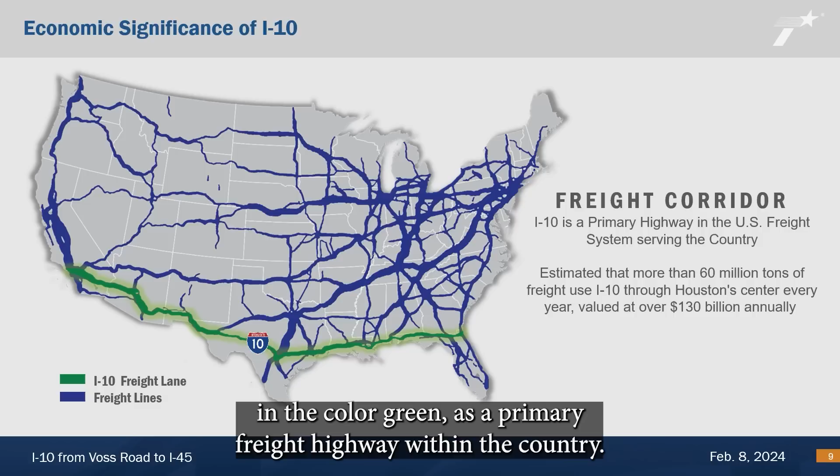The U.S. Department of Transportation has identified I-10, shown in the color green, as a primary freight highway within the country. Primary freight highways are those that are the most critical for freight transportation across the country. It is important to the movement of goods across the nation, Texas, and Houston itself.

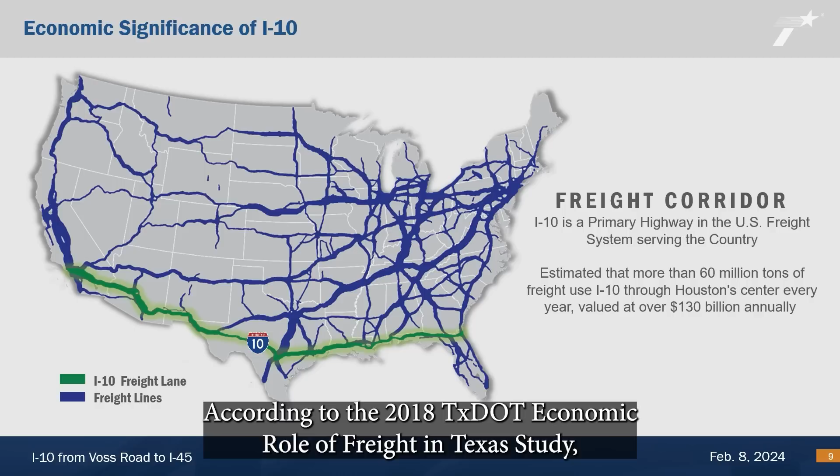Congestion increases the cost and delivery time of commodities such as Amazon deliveries, groceries, and commercial goods. The Port of Houston is the nation's largest port for waterborne tonnage and an essential economic engine for the Houston region. According to the 2018 TxDOT Economic Role of Freight in Texas study, it is estimated that more than 60 million tons of freight use I-10 through Houston Center every year, valued at over $130 billion annually.

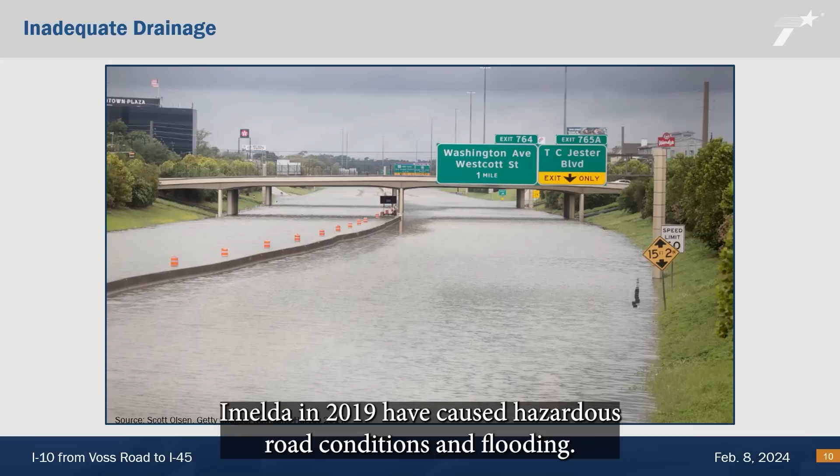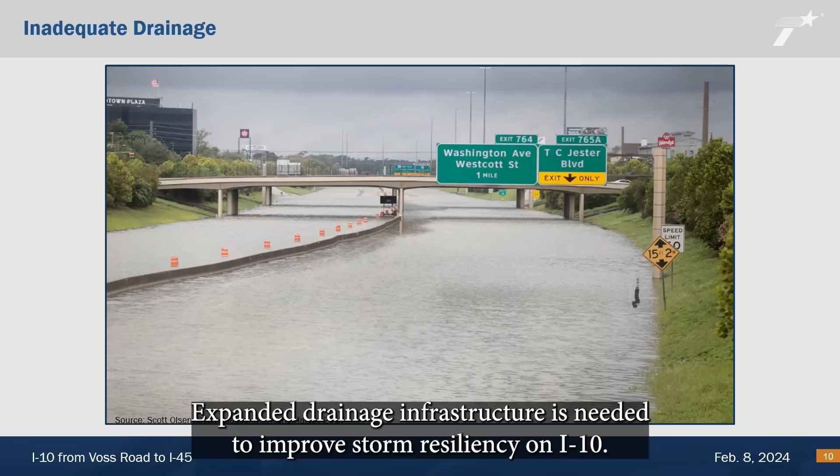Major rainfall events, such as Hurricane Harvey in 2017 and Tropical Storm Imelda in 2019, have caused hazardous road conditions and flooding. This flooding has reduced mobility and access to local and regional destinations during flood events. Expanded drainage infrastructure is needed to improve storm resiliency on I-10.

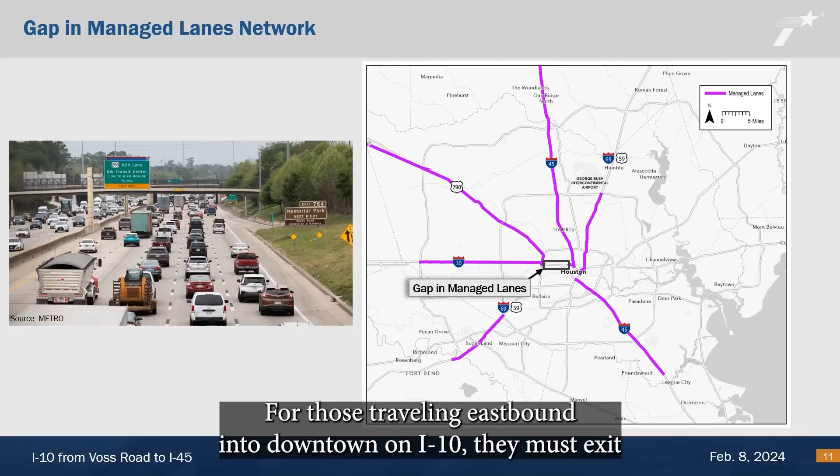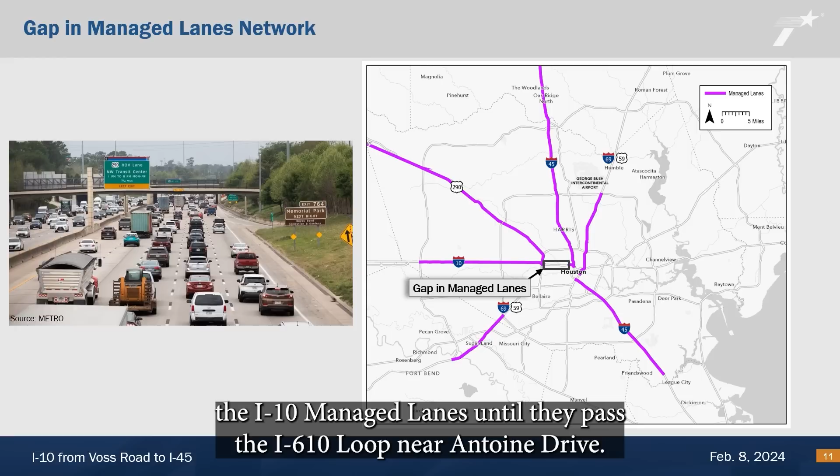Finally, this slide illustrates the gap in the regional managed lanes network. For those traveling eastbound into downtown on I-10, they must exit the I-10 managed lanes near Silber Road and merge into the general purpose lanes. Conversely, commuters leaving downtown to go westbound cannot enter the I-10 managed lanes until they pass the I-610 loop near Antoine Drive. After identifying the needs, the project team developed a purpose statement for the proposed project.

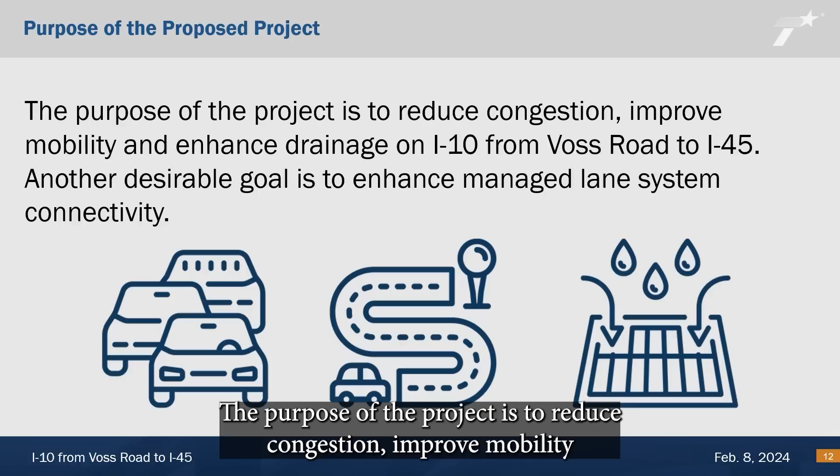The purpose of the project is to reduce congestion, improve mobility, and enhance drainage on I-10 from Voss Road to I-45. Another desirable goal is to enhance managed lane system connectivity.

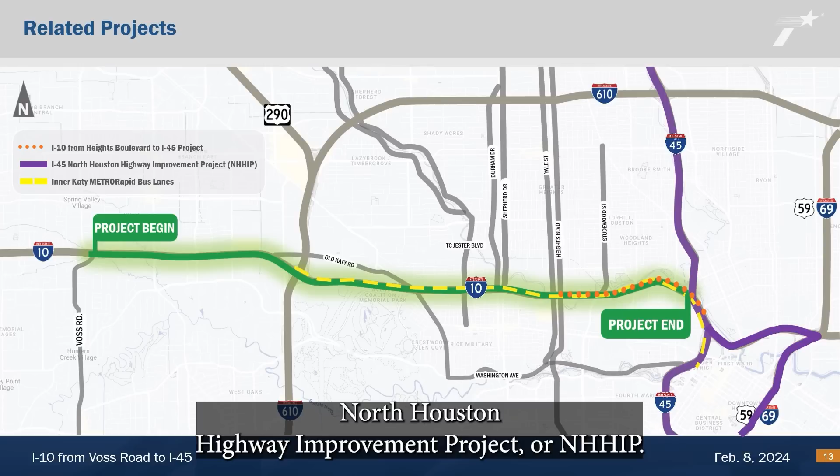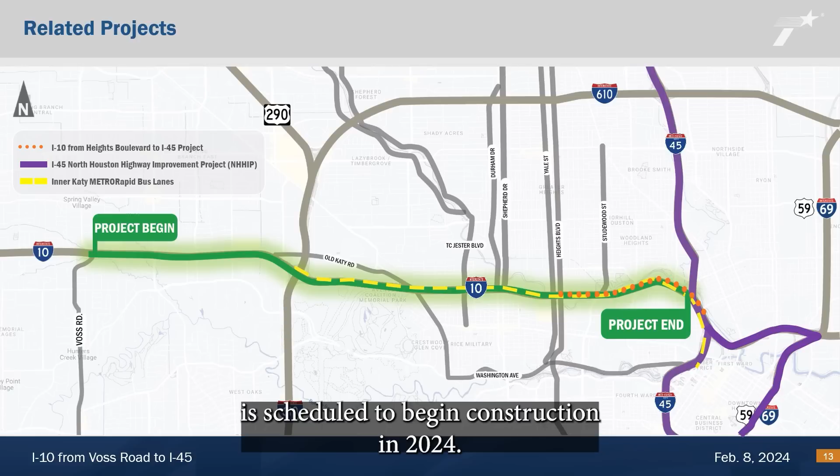TxDOT is also progressing the I-45 North Houston Highway Improvement Project, or NHHIP. This project, shown in purple, will include improvements to I-45. This project will be constructed in phases, and the first phase is scheduled to begin construction in 2024. Information about these two projects is available on the TxDOT Houston District website.

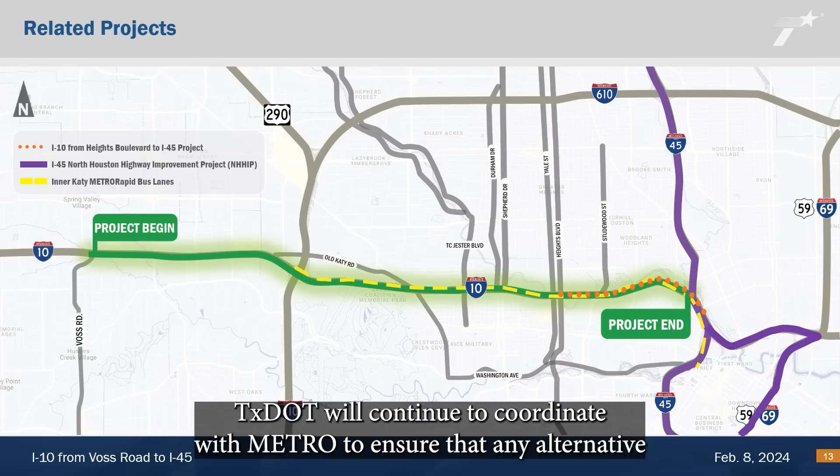METRO is advancing the Inner Katy METRORapid Bus Lanes project on the south side of the I-10 general purpose lanes within TxDOT right-of-way, shown in yellow on the slide. TxDOT will continue to coordinate with METRO to ensure that any alternative considered for the Inner Katy Corridor Managed Lanes project also accommodates the space needed for the METRORapid Bus Lanes project. Construction is expected to be completed by early 2028.

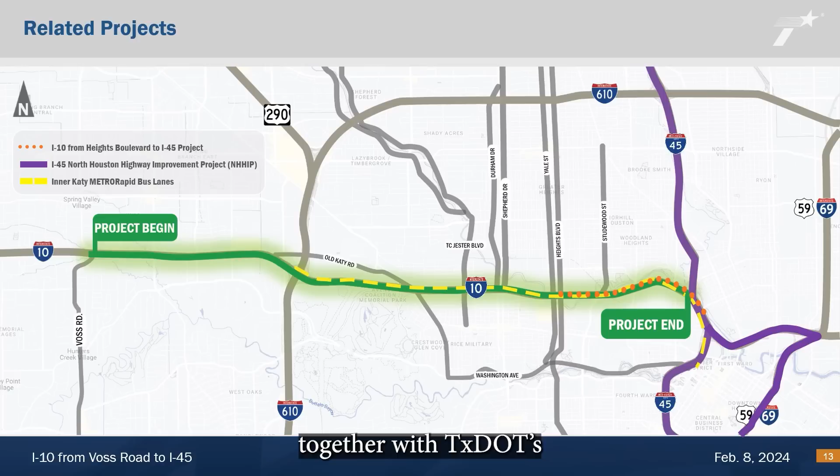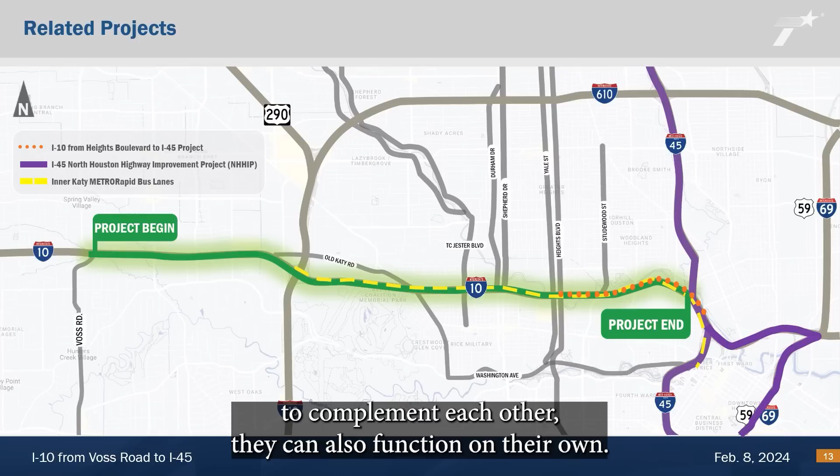These three projects, together with TxDOT's Inner Katy Corridor Managed Lanes project, would complement each other to meet regional transportation mobility, connectivity, and resiliency needs. However, it should be noted that while they are intended to complement each other, they can also function on their own. If one project does not progress through the process to construction, the others could still be constructed to fulfill their independent project goals.

Now that we've had a brief project overview, discussed why improvements are needed, and summarized the goals for the project, let's walk through a bit of project history. I will also provide updates on where the project team is now and how you can help.

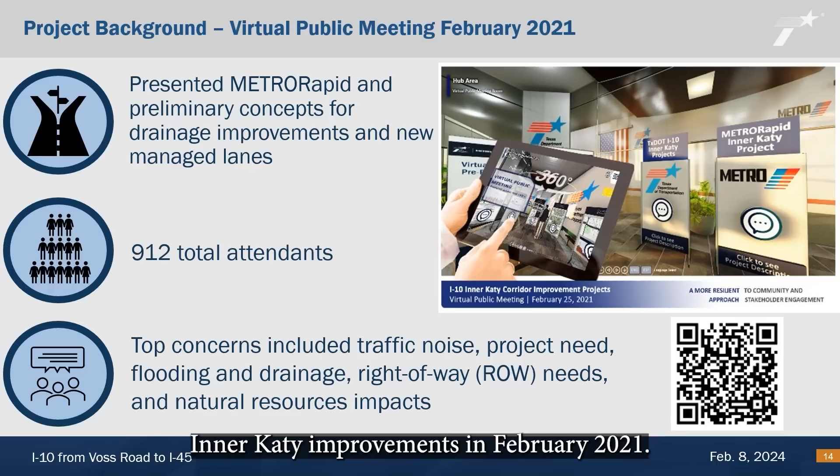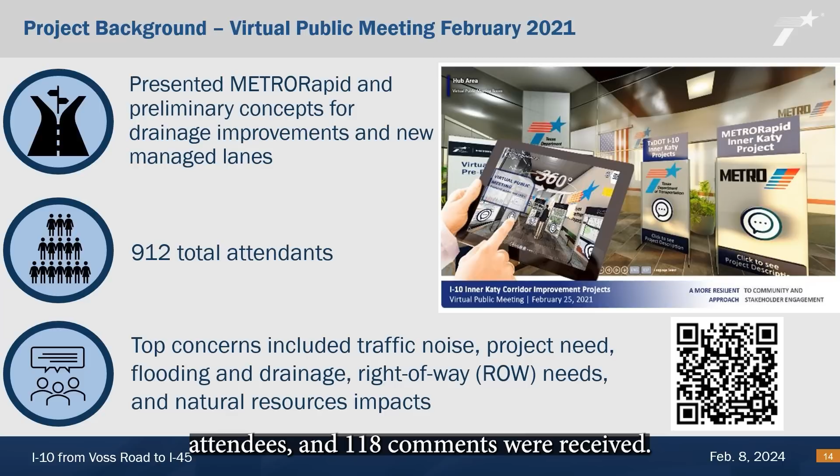Due to the COVID restrictions in place at the time, TxDOT held a virtual public meeting for proposed Inner Katy improvements in February 2021. This virtual public meeting presented preliminary I-10 Inner Katy concepts that included drainage improvements and managed lanes. METRO also participated in this meeting and presented their proposed METRORapid dedicated bus lanes facility within the Inner Katy Corridor. There were a total of 912 attendees and 118 comments were received.

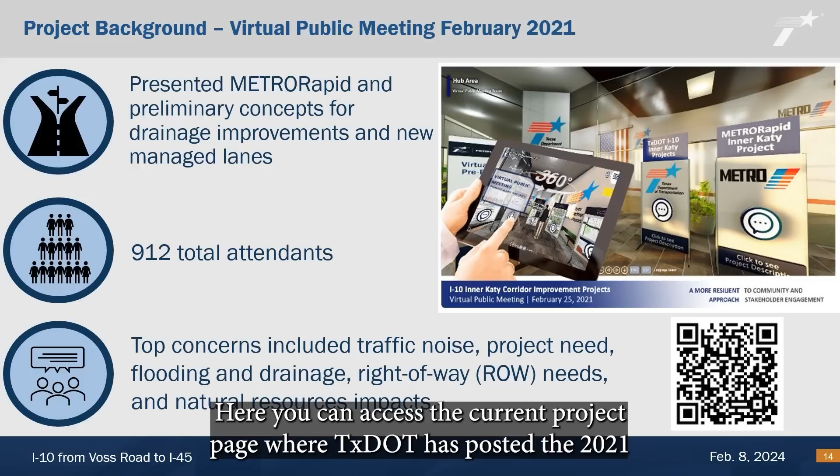Top concerns included traffic noise, project need, flooding and drainage, right-of-way needs, and impacts to natural resources. The QR code shown on the screen provides a link to the TxDOT Public Hearings, Meetings, and Notices website. Here you can access the current project page where TxDOT has posted the 2021 public meeting summary and comments.

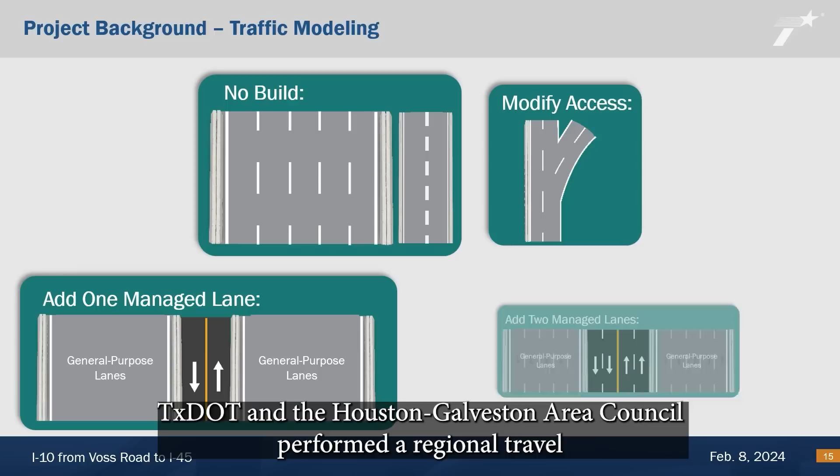After the public meeting was held in 2021, TxDOT and the Houston-Galveston Area Council performed a regional travel demand analysis for I-10 between I-610 and I-45. The analysis used modeling software to simulate how different lane configurations would handle future vehicle volumes using the least possible amount of right-of-way.

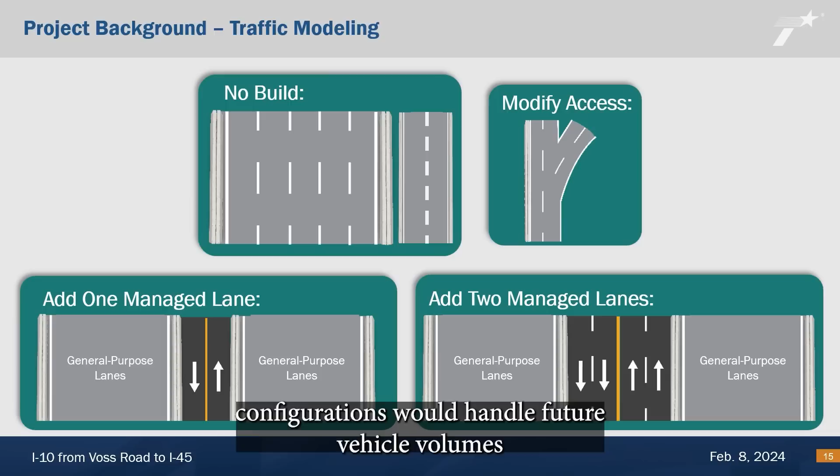In this case, modelers used predicted traffic numbers for the year 2045. It should be noted that all simulations incorporated Metro's rapid bus lane project. The various options that were considered include no build. This option would not change the number of I-10 general purpose lanes nor add any additional managed lanes. The no build option includes Metro's plan to construct elevated Metro rapid bus lanes.

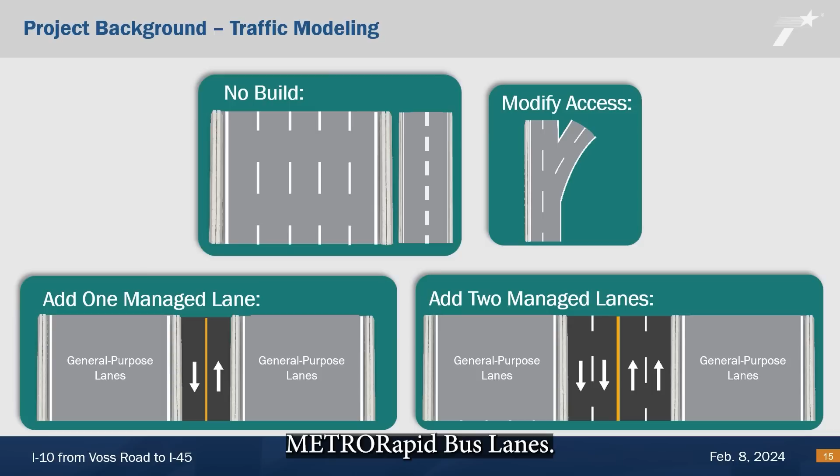Modify access. This option would consolidate on and off ramps between I-610 and I-45 to reduce congestion that occurs due to lane changes at ramps and would maintain the existing number of general purpose lanes in each direction.

Four options were considered to add managed lanes. The first option would add one managed lane in each direction while maintaining the existing number of general purpose lanes in each direction. The second option would add one managed lane in each direction but would reduce the number of general purpose lanes to four lanes in each direction.

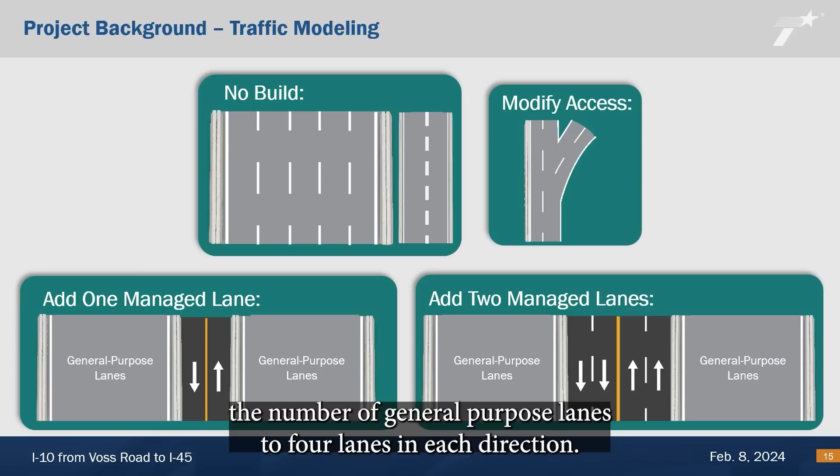The third option would add 2 managed lanes in each direction while maintaining the existing number of general purpose lanes in each direction. The fourth option would add 2 managed lanes in each direction but would reduce the number of general purpose lanes to 4 lanes in each direction.

The project team then studied how many people per day each configuration would accommodate. Traffic analysis indicated that the no-build option would have a capacity of approximately 380,000 people a day traveling this portion of I-10. Four of the five options evaluated would only slightly increase the number of people I-10 could accommodate per day. The option that proposed to add 2 managed lanes in each direction while maintaining the 5 general purpose lanes in each direction would provide the most benefits by facilitating the movement of approximately 460,000 people a day. While congestion on the general purpose lanes is anticipated to return to existing levels in 2045, the managed lanes are anticipated to maintain free flow conditions during peak travel times.

Taking the results of the study, the engineering team conceptually designed alternatives that could provide this lane configuration. The next part of the presentation will provide an overview of the alternatives being considered and for which TxDOT is seeking your input.

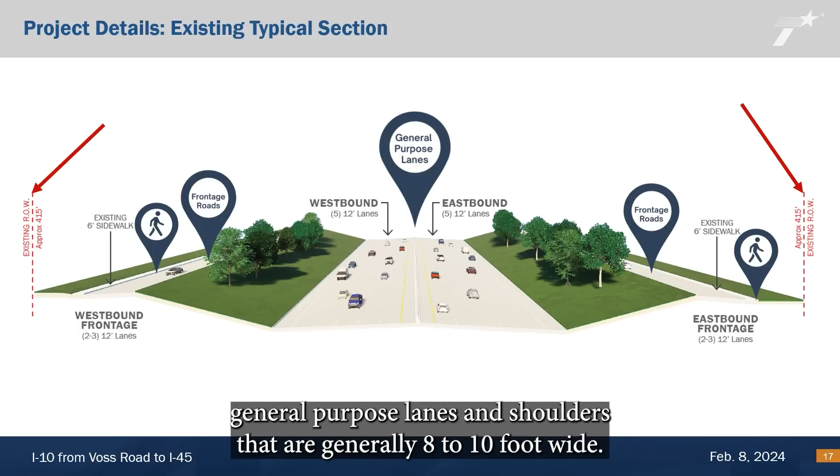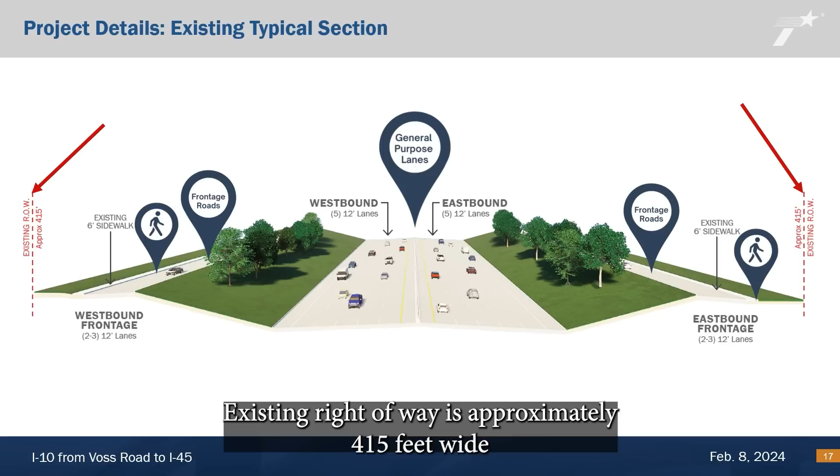This slide illustrates a typical cross-section of the I-10 general purpose lanes and frontage roads as they look today. Within the existing right-of-way, the roadway is 5 lanes in each direction, with 12-foot wide general purpose lanes and shoulders that are generally 8 to 10 foot wide. Discontinuous frontage roads are 2 to 3 12-foot wide lanes in each direction. There are existing 6-foot wide sidewalks along the frontage road. Existing right-of-way is approximately 415 feet wide and is shown in red on the outsides of the typical section.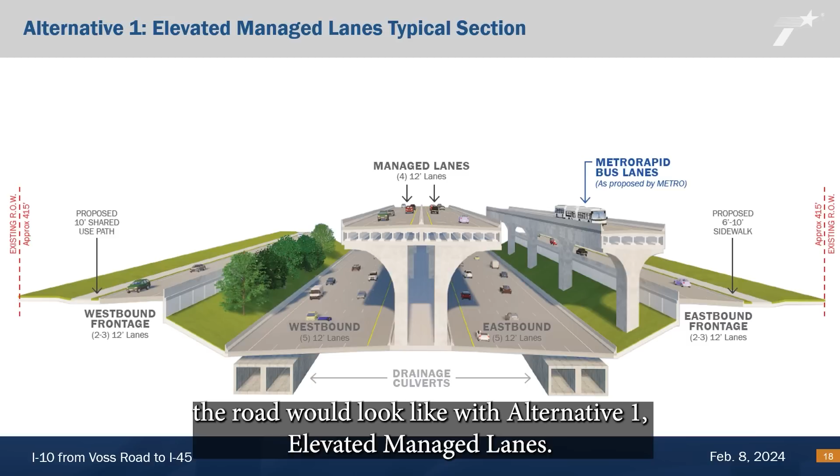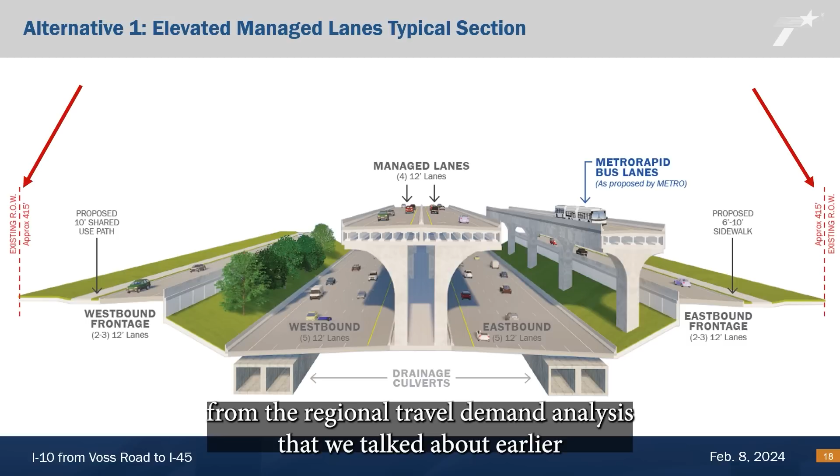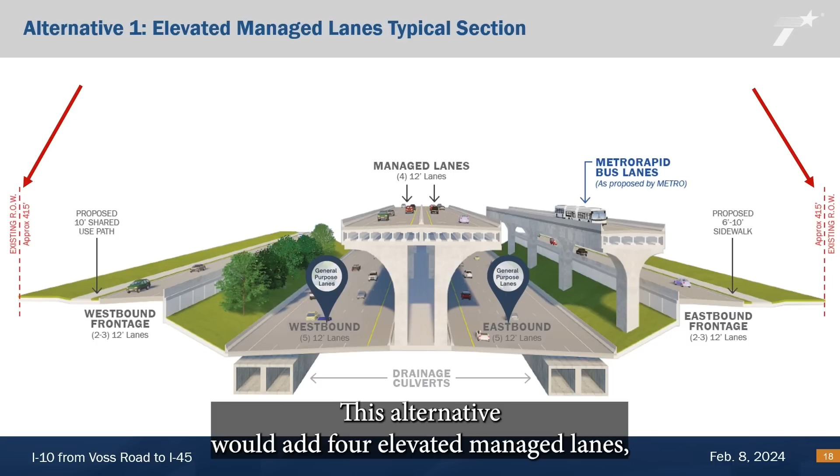This slide illustrates a proposed typical section of what the road would look like with Alternative 1, elevated managed lanes. This alternative generally fits within the existing right-of-way that is approximately 415 feet wide. Alternative 1 follows the recommendations from the regional travel demand analysis and would retain the same number of general purpose lanes, 5 in each direction. The general purpose lanes would be reconstructed to meet current design standards, including improved height clearances at bridge crossings. This alternative would add 4 elevated managed lanes, 2 in each direction, in the center of the I-10 corridor.

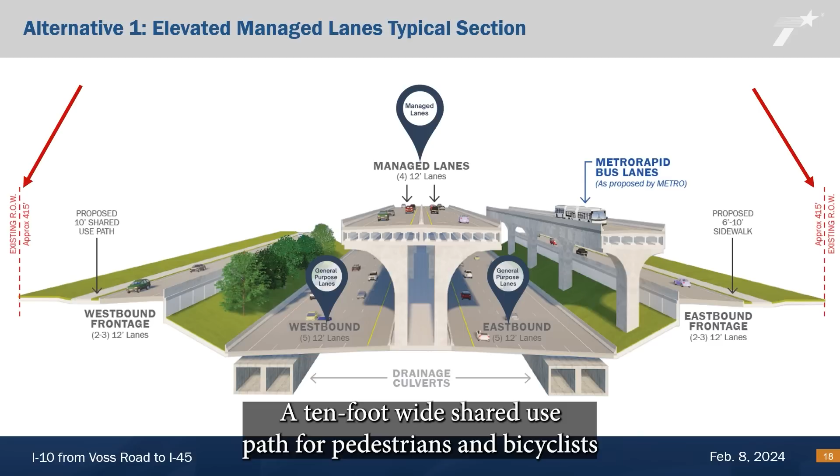The westbound and eastbound frontage roads would be reconstructed to meet current design standards. A 10-foot wide shared use path for pedestrians and bicyclists would be added along the westbound frontage road. The sidewalk along the eastbound frontage road would be reconstructed. Drainage culverts would be installed under the roadway to improve the drainage system capacity to be more resilient during major rainfall events.

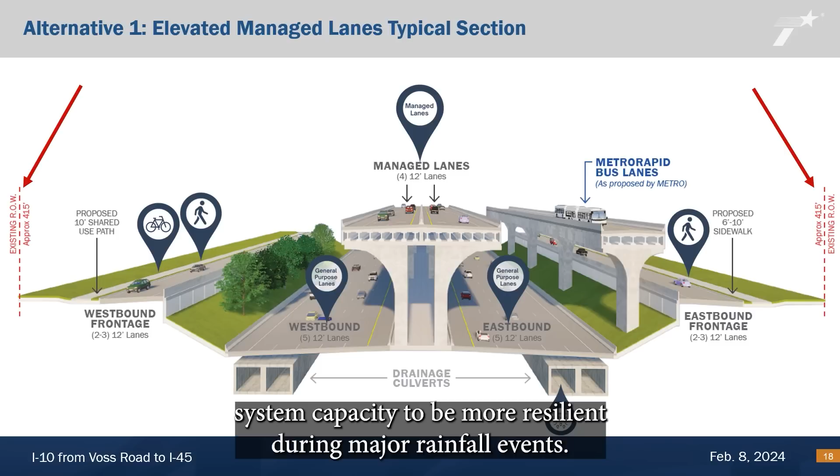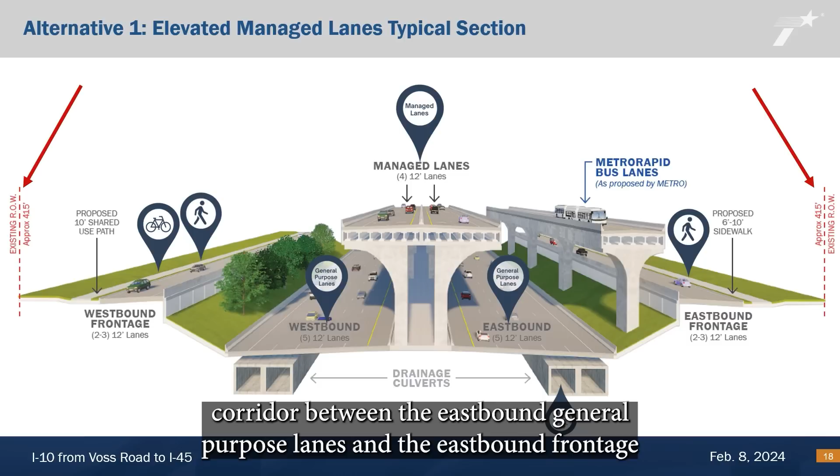As noted earlier in the presentation, Metro plans to construct elevated Metro rapid bus lanes on the south side of the I-10 corridor between the eastbound general purpose lanes and the eastbound frontage road within TxDOT right-of-way, as shown on the right side of this illustration.

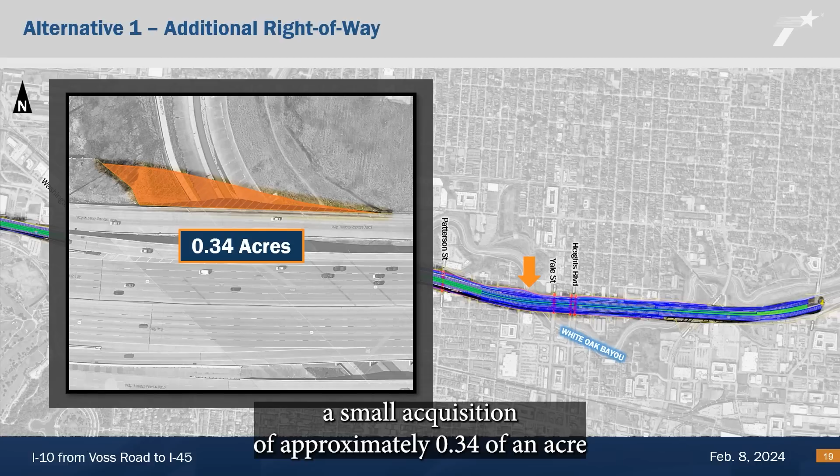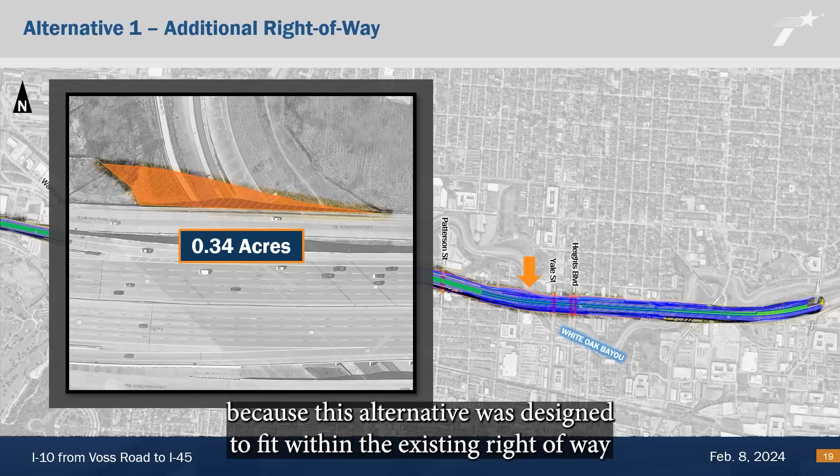While Alternative 1 would generally fit within the existing right-of-way limits, a small acquisition of approximately 0.34 of an acre would be needed near White Oak Bayou from property owned by the Harris County Flood Control District. This acquisition would be needed for braided ramp structural support. No other right-of-way is anticipated because this alternative was designed to fit within the existing right-of-way in response to community concerns expressed in the 2021 virtual public meeting. No displacements are anticipated as a result of this additional right-of-way.

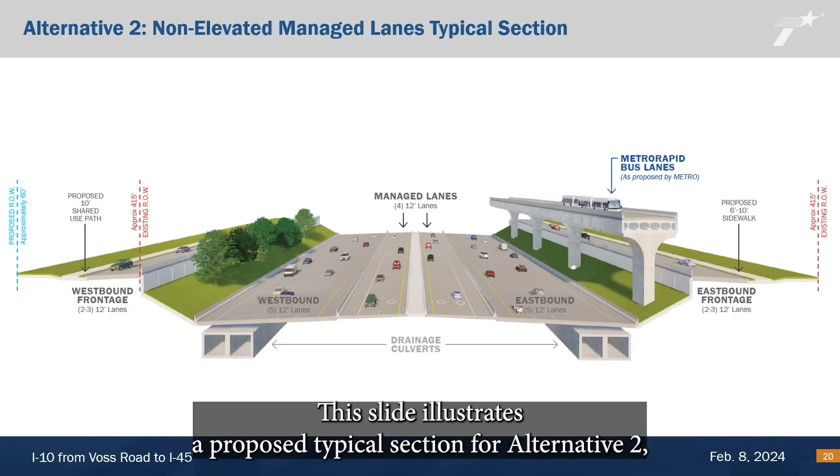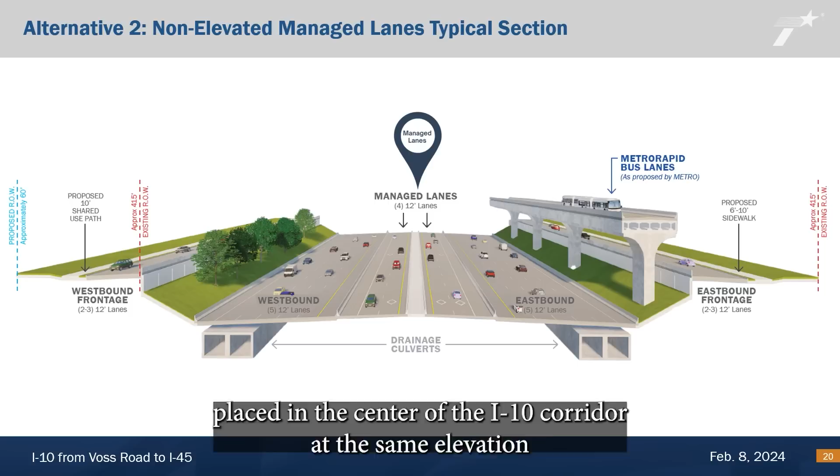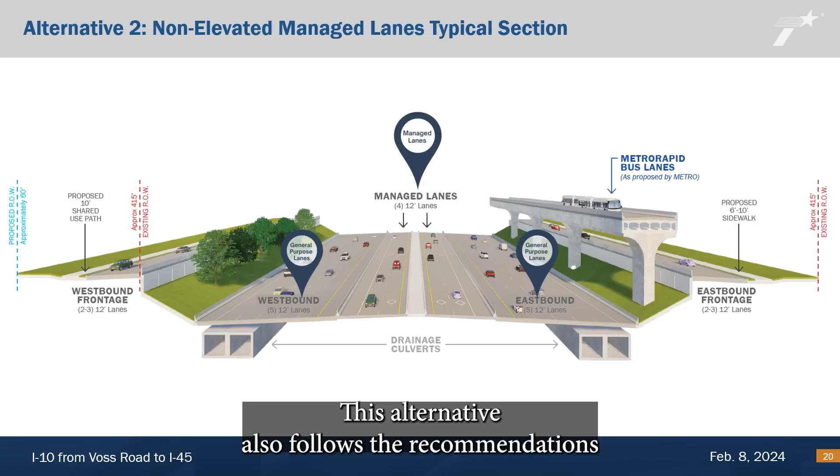This slide illustrates a proposed typical section for Alternative 2, non-elevated managed lanes. This alternative would add 4 managed lanes, 2 in each direction, placed in the center of the I-10 corridor at the same elevation as the general purpose lanes, 5 in each direction, as shown on this slide. The general purpose lanes would be reconstructed to meet current design standards and to provide for improved bridge height clearances. This alternative also follows the recommendations from the Regional Travel Demand Analysis.

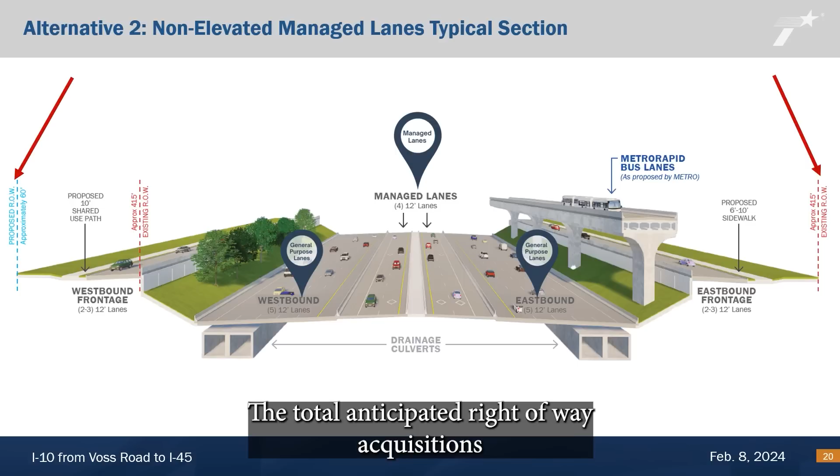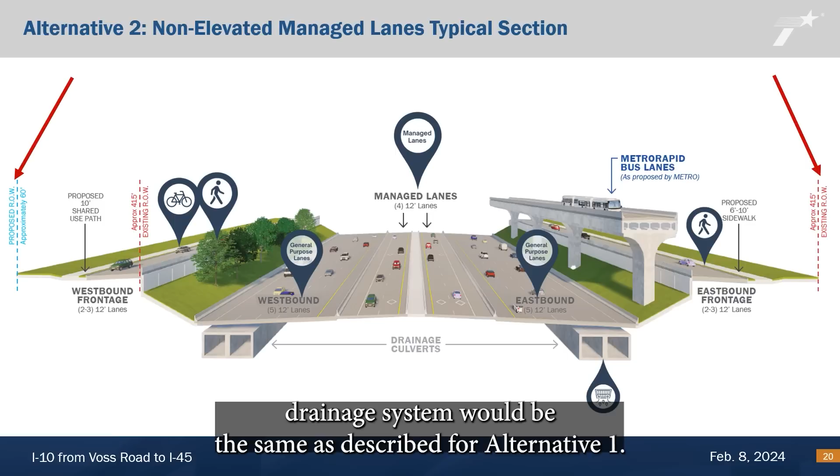Alternative 2 would typically require an additional 60 feet of right-of-way along the majority of the corridor to accommodate the proposed improvements. The total anticipated right-of-way acquisitions would be approximately 12.54 acres along the westbound frontage road. All other project elements, such as shared use paths, sidewalks, improved frontage roads, and the expanded drainage system, would be the same as described for Alternative 1.

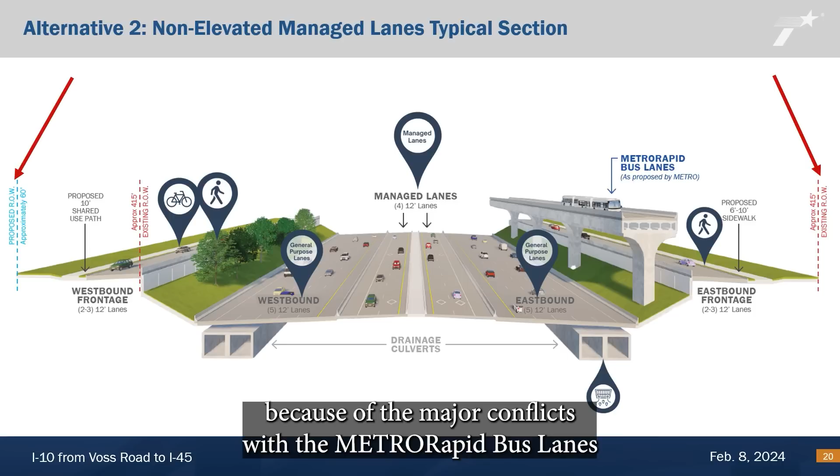TxDOT also considered a configuration of non-elevated lanes with right-of-way expansion along the eastbound frontage lanes. This alternative was eliminated from further consideration because of the major conflicts with the METRORapid bus lanes, which will be constructed within the TxDOT right-of-way to the south of the eastbound general purpose lanes.

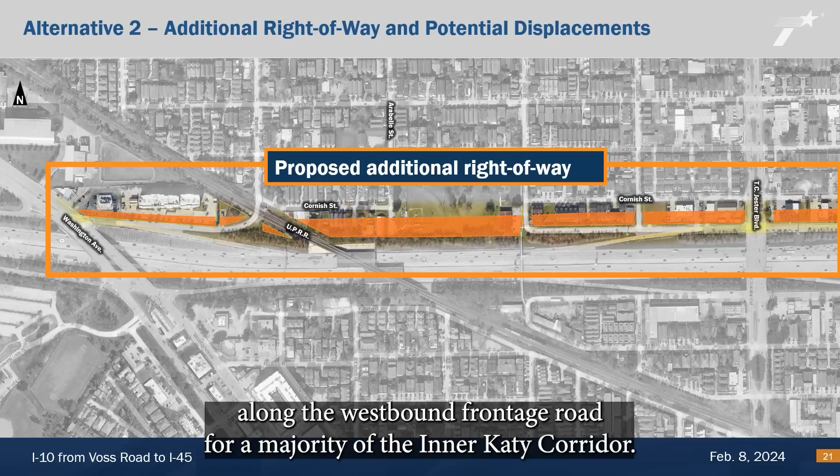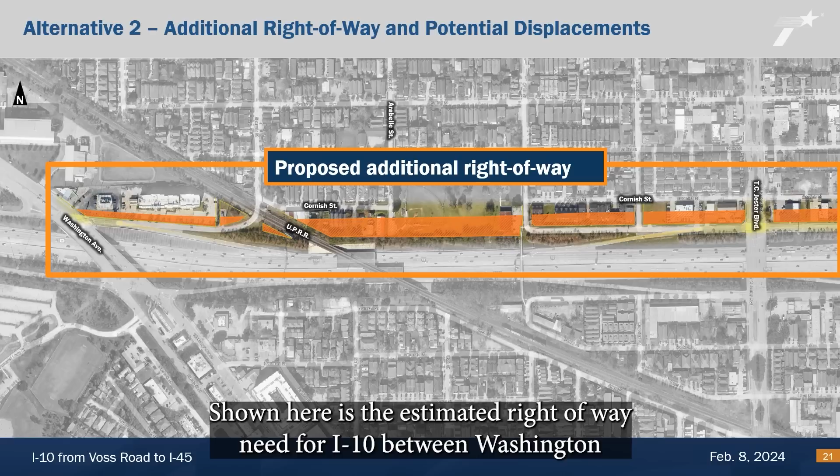Alternative 2 would require widening of TxDOT's right-of-way north of I-10 along the westbound frontage road for a majority of the Inner Katy Corridor. Acquisitions would total 12.54 acres and would require an estimated displacement of 52 residences and 30 commercial structures. Shown here is the estimated right-of-way need for I-10 between Washington Avenue and T.C. Jester Boulevard.

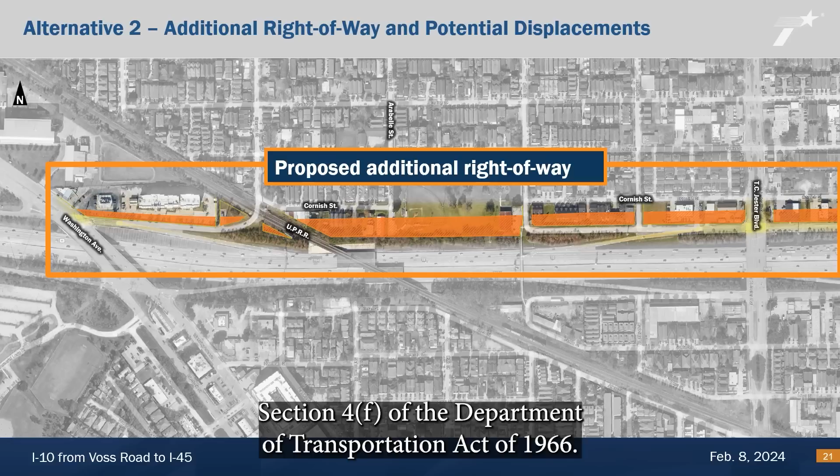This alternative would require the acquisition of 0.53 acres from the Cottage Grove Park and triggers Section 4(f) of the Department of Transportation Act of 1966.

Now that we have discussed the typical sections of the two proposed alternatives, we will explain the details of the proposed project along the corridor.

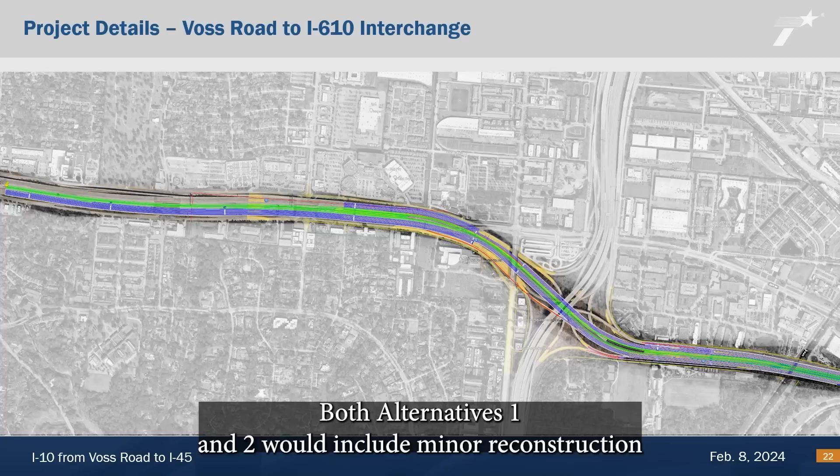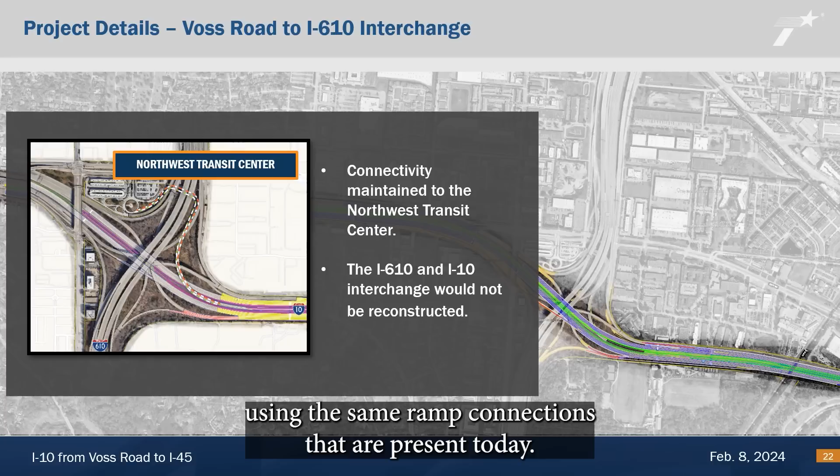Both alternatives 1 and 2 would include minor reconstruction and restriping along I-10 between Voss Road and I-610 to add the 4 proposed managed lanes within existing right-of-way. Access to the Northwest Transit Center would be maintained. Vehicles would be able to access managed lanes connections for US 290 using the same ramp connections that are present today. The I-10/I-610 interchange would not be reconstructed with either of the alternatives being considered.

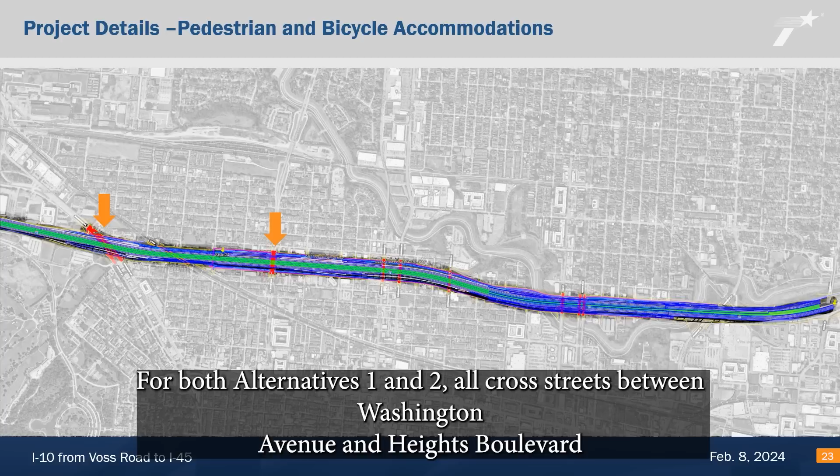For both alternatives 1 and 2, all cross streets between Washington Avenue and Heights Boulevard would be reconstructed and would provide accommodations for bicyclists and pedestrians within TxDOT's right-of-way. This slide shows the bicycle and pedestrian elements that would be built on all cross streets in the project.

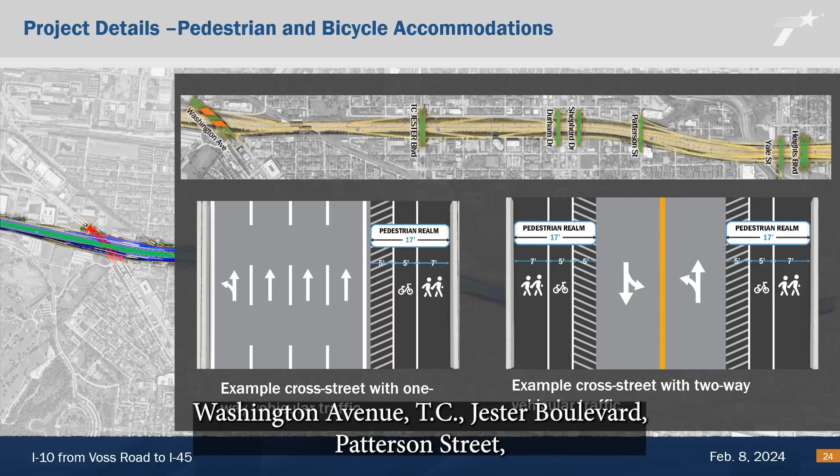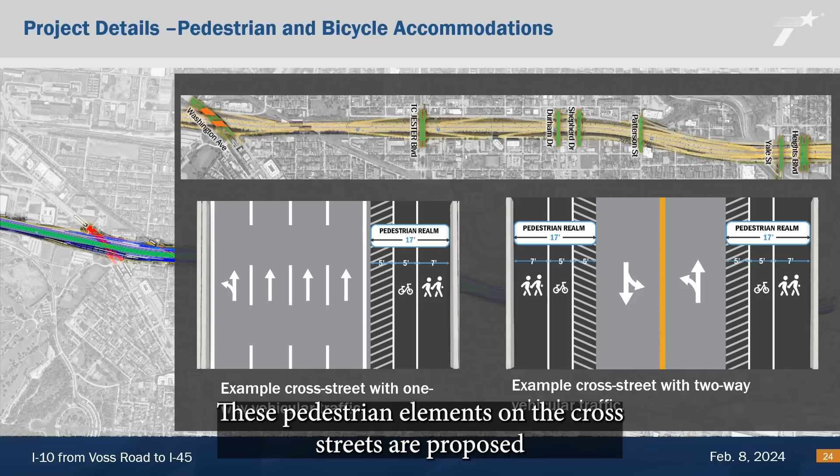As shown, there would be a 5-foot wide buffer area between the vehicle lanes and the 5-foot wide bike lane, and a 7-foot wide sidewalk. The two-way streets, Washington Avenue, T.C. Jester Boulevard, Patterson Street, Yale Street, and Heights Boulevard, would have pedestrian elements on both sides of the roadway. The one-way streets, Durham Drive and Shepherd Drive, would have pedestrian elements on one side of the roadway. These pedestrian elements on the cross streets are proposed for both alternative options.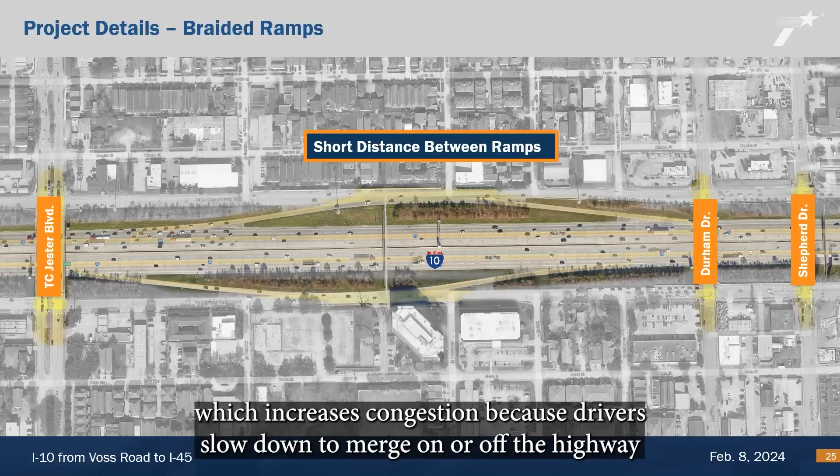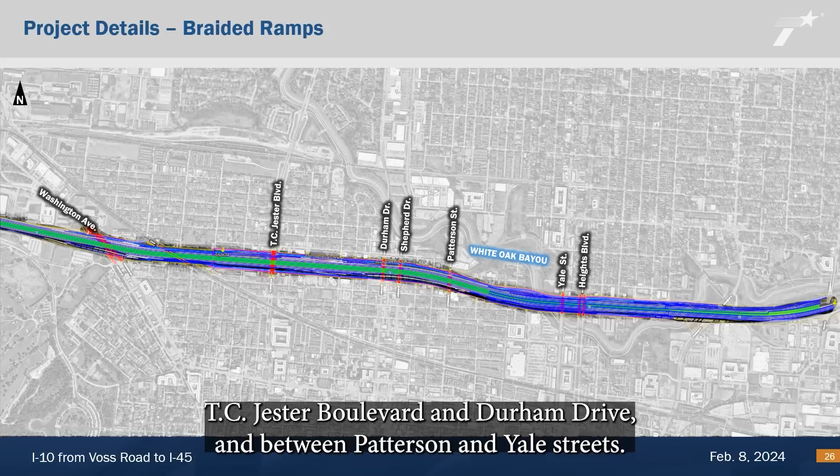On I-10 today, the entrance and exit ramps are placed close together, which increases congestion because drivers slow down to merge on or off the highway, and decreases safety because of the short distance to make lane changes. To improve operations, braided ramps would be proposed for both Alternative 1 and 2 between T.C. Jester Boulevard and Durham Drive, and between Patterson and Yale Streets.

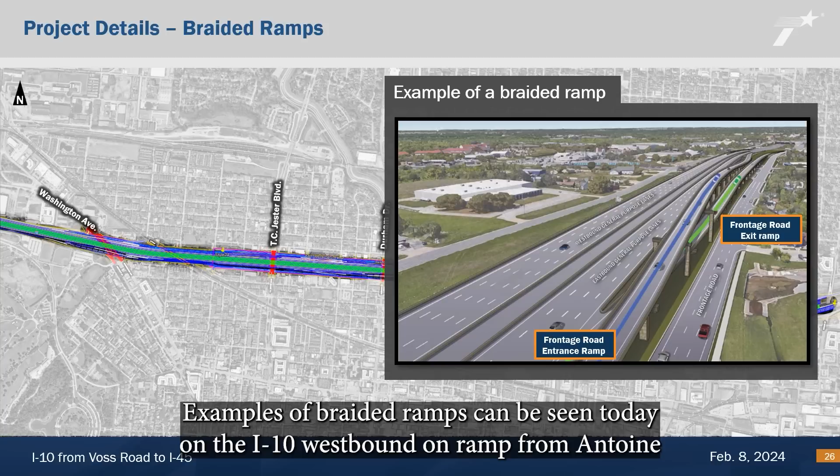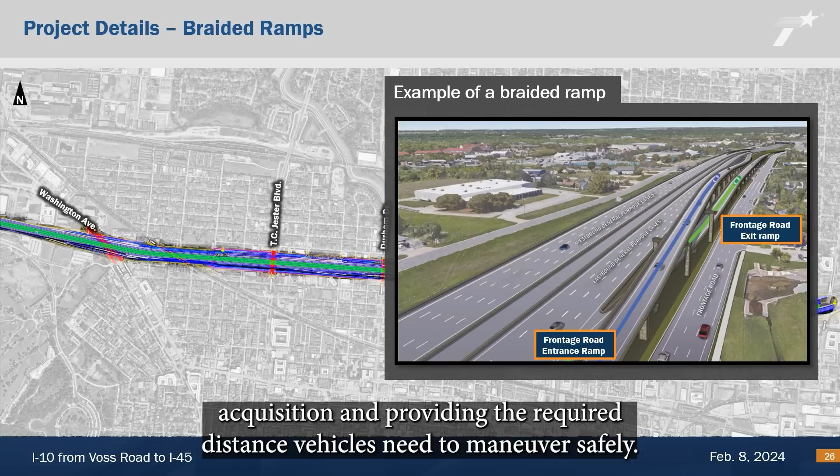Braided ramps are when entrance and exit ramps cross paths but are physically separated, with one ramp crossing over the other. Examples of braided ramps can be seen today on the I-10 westbound on-ramp from Antoine Drive and the exit ramp from I-10 westbound to Chimney Rock/Wirt Road. These improved ramps would maintain access while minimizing right-of-way acquisition and providing the required distance vehicles need to maneuver safely. The locations of the proposed braided ramps would not change current access to and from the cross streets.

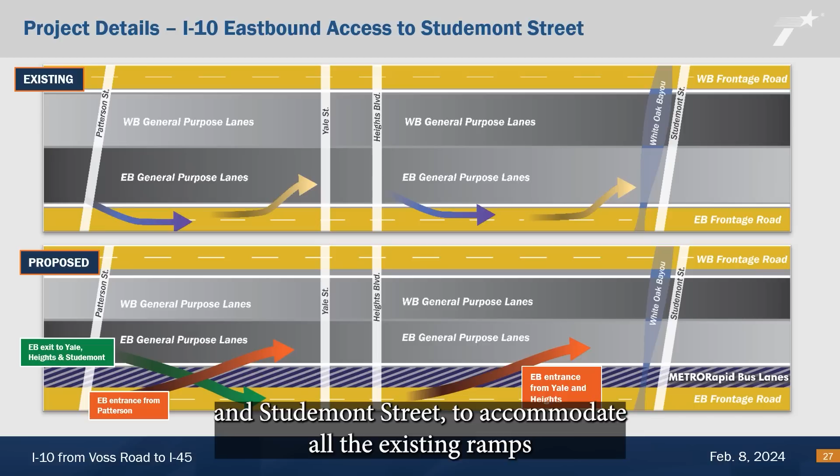For the proposed alternatives, there would not be enough space along I-10 eastbound between Heights Boulevard and Studemont Street to accommodate all of the existing ramps and the proposed METRORapid bus lanes within the existing right-of-way. The proposed ramp configuration for both alternatives 1 and 2 in this section of I-10 is illustrated on the slide.

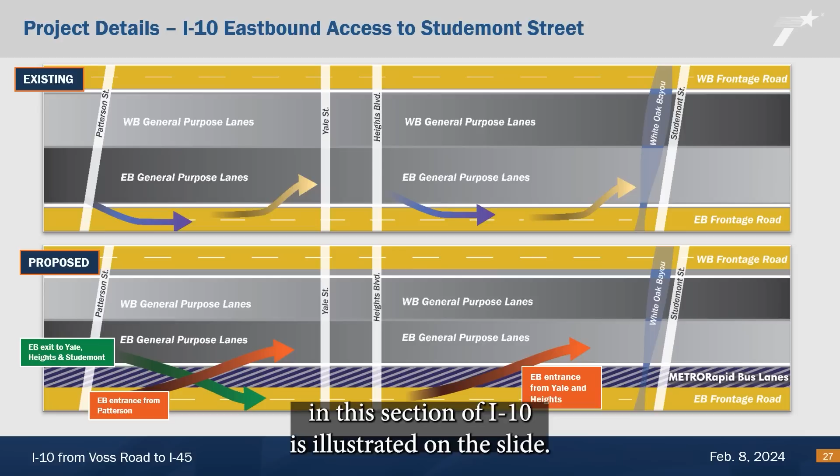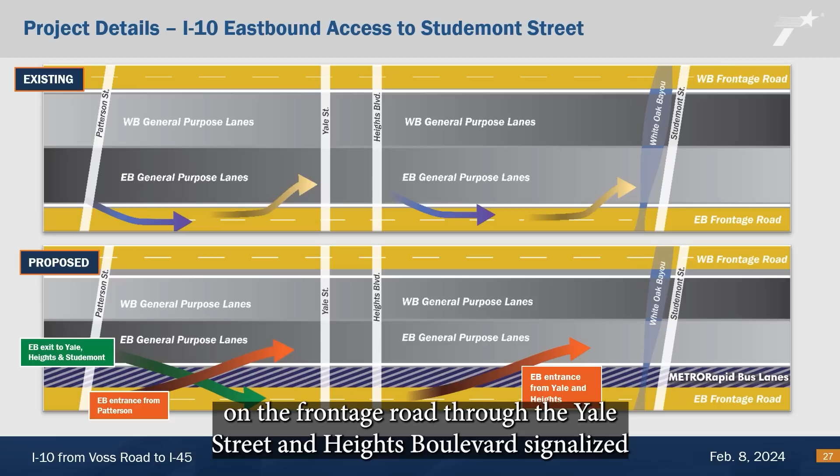The proposed configuration includes an eastbound entrance ramp from Patterson Street and a separate entrance ramp from Yale Street and Heights Boulevard. There would be a single exit ramp to Yale Street, Heights Boulevard, and Studemont Street. Eastbound traffic exiting to Studemont Street would travel on the frontage road through the Yale Street and Heights Boulevard signalized intersections to access Studemont Street. Additionally, a U-turn is proposed on the eastbound frontage road at Yale Street.

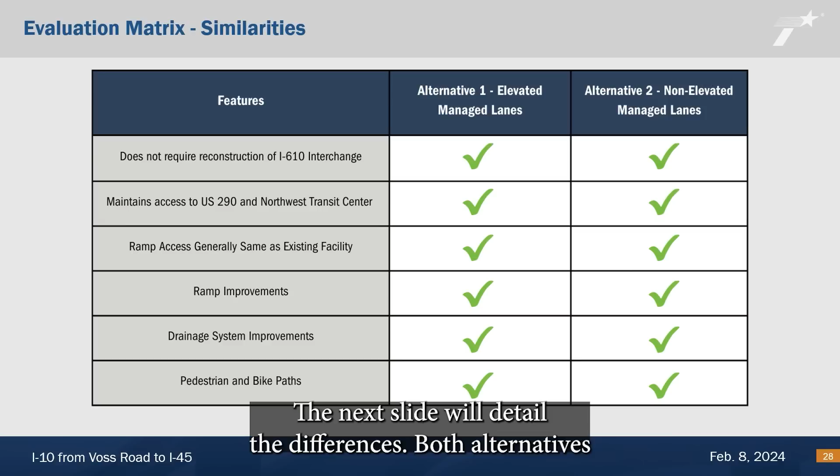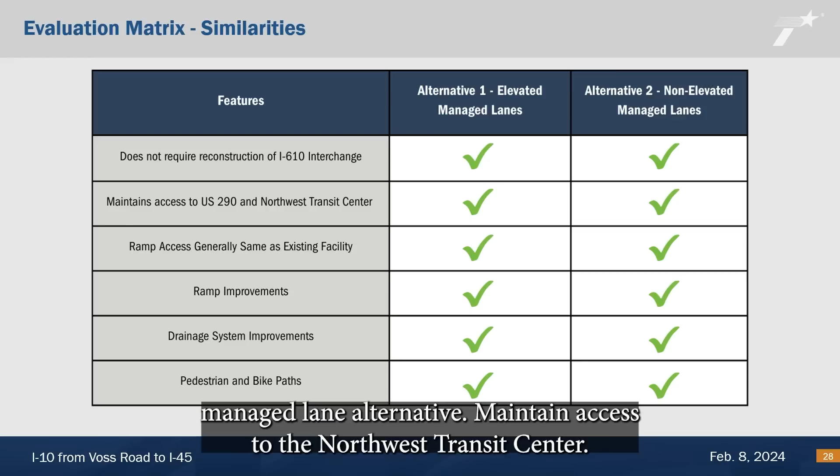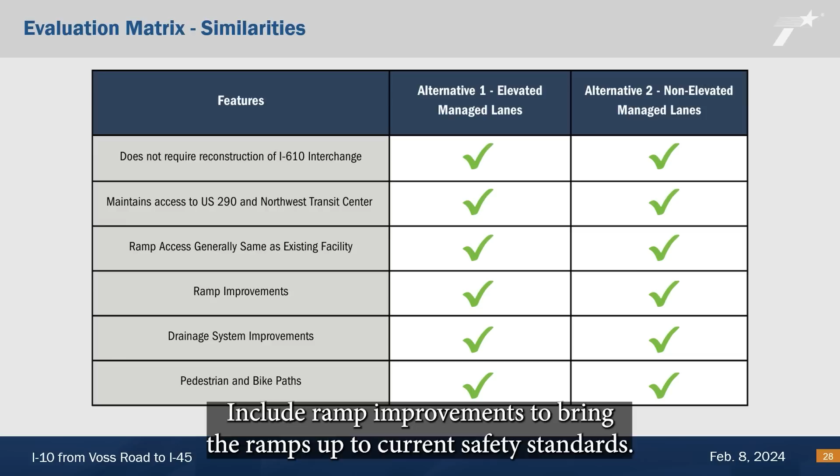Both alternatives would not require the reconstruction of the I-610 and I-10 interchange. This interchange would only be restriped to accommodate each proposed managed lane alternative. Both would maintain access to the Northwest Transit Center, retain ramp access in generally the same locations with the exception of the I-10 eastbound exit to Studemont Street, which would be combined with the exit to Yale Street and Heights Boulevard. Both include ramp improvements to bring the ramps up to current safety standards, improve the drainage system and enhance resiliency during major rainfall events, and provide accommodations for pedestrians and cyclists.

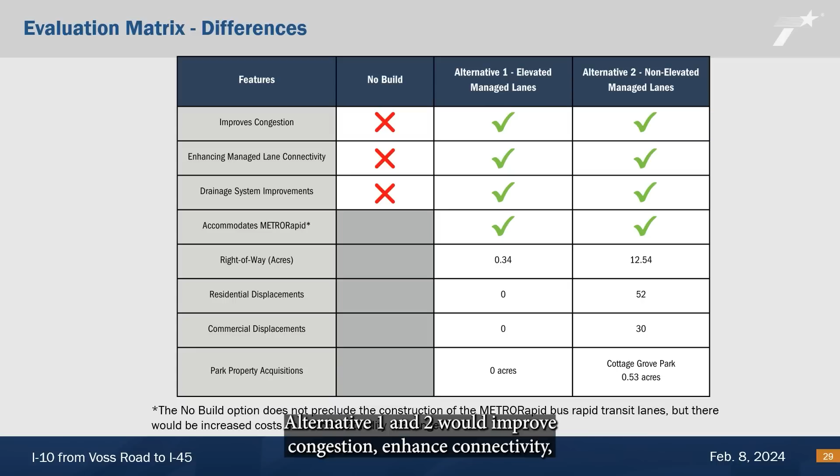This evaluation matrix shows the differences between Alternative 1, Alternative 2, and the no-build option. Alternative 1 and 2 would improve congestion, enhance connectivity, improve drainage, accommodate METRORapid's Bus Rapid Transit project, and meet the purpose and need. The no-build option would not meet these criteria.

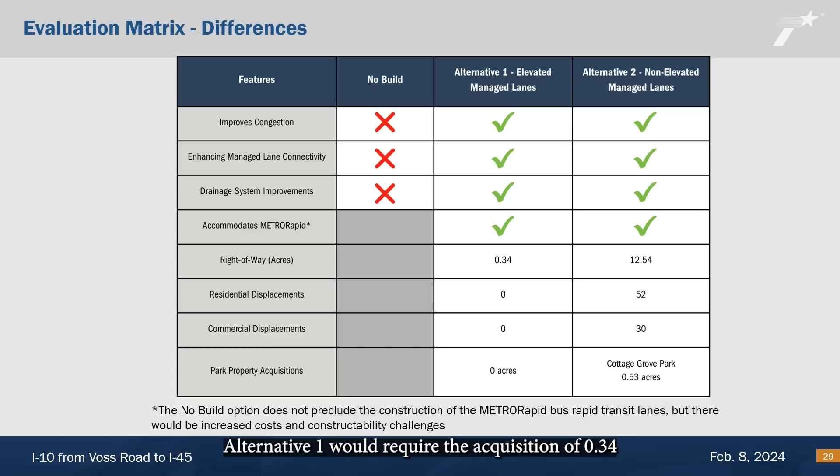Alternative 1 would require the acquisition of 0.34 acres of Harris County flood control property and would not result in any displacements of residential or commercial property.

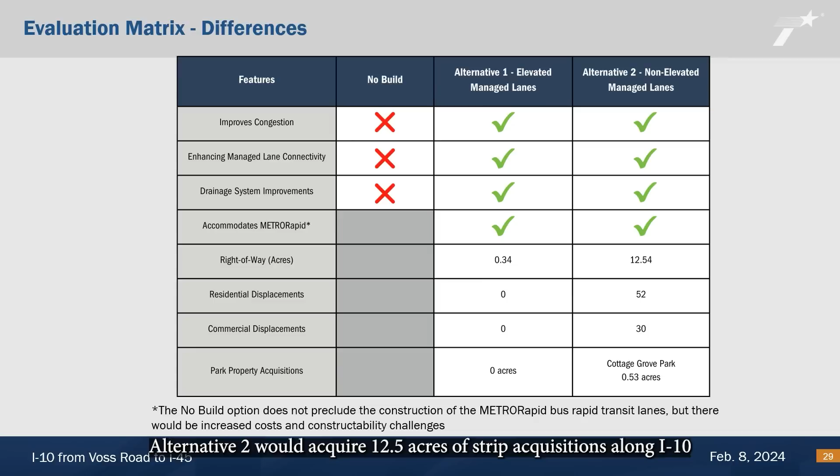Alternative 2 would acquire 12.5 acres of strip acquisitions along I-10 and would potentially require the acquisition and displacement of 52 residences and 30 commercial structures. Alternative 2 would include the acquisition of 0.53 acres from the 5.15-acre Cottage Grove Park.

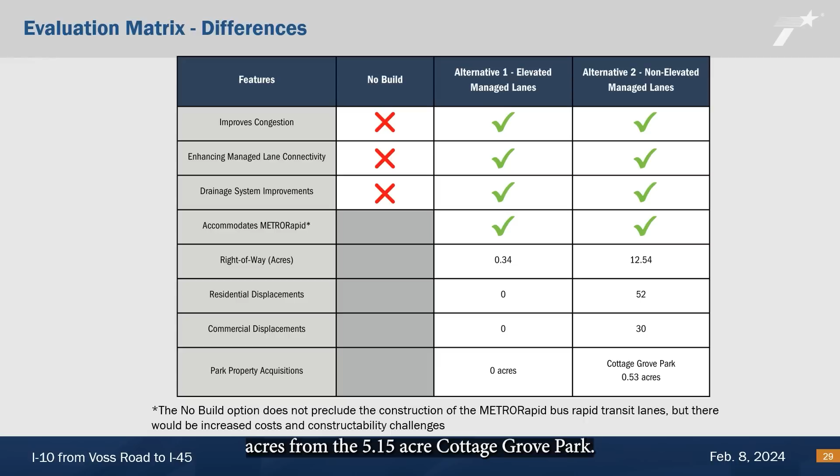The next steps include selecting a preferred alternative and beginning the environmental study. Then a public hearing would be held to share the results of the environmental assessment prior to an environmental decision being made. Then once a decision is made, detailed design activities and right-of-way acquisition processes would begin.

A construction letting date is anticipated for late 2027, with groundbreaking activities anticipated to start early 2028. The project team estimates that construction would be implemented in phases and would take approximately 6 to 8 years to complete all phases.

This project is anticipated to receive federal funds, and because of the federal component, TxDOT is required to assess the potential environmental effects of the proposed project in accordance with federal standards. The process that is followed is called the National Environmental Policy Act process, otherwise known as NEPA. The NEPA process provides analyses of the potential impacts to the natural and man-made environment and helps the decision maker to make an informed decision on whether or not to proceed with the project.

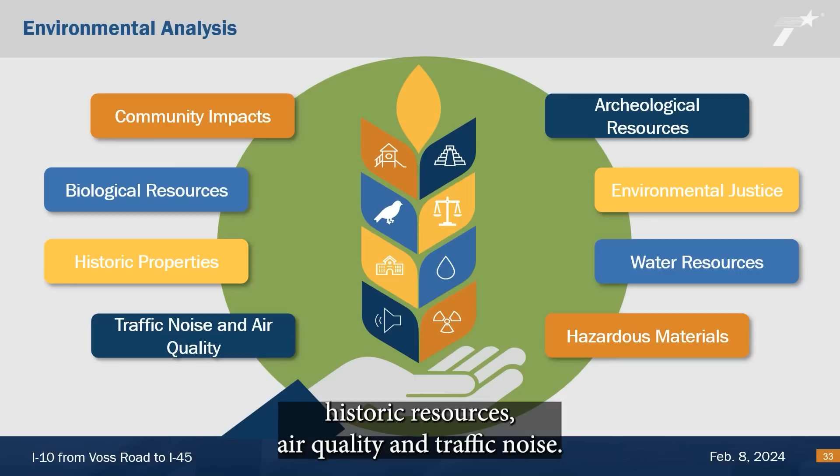After the selection of an alternative, the project team will identify and evaluate potential environmental impacts that could occur as a result of constructing the selected alternative. Areas that would be reviewed include biological resources, community impacts, environmental justice, water resources, hazardous materials, archaeological resources, historic resources, air quality, and traffic noise.

Once completed, technical reports documenting the analysis and conclusions of these studies will be summarized in an environmental document that will be made available. TxDOT encourages you to review the materials regarding the proposed project and provide feedback.

You may submit comments in the following ways. Download the comment card from the project webpage, www.txdot.gov/projects/hearings-meetings.html, and email to hou-piowebmail@txdot.gov. Fill out the comment card at the open house and drop in the comment box. Or mail the comment card to TxDOT Houston District, attention Advanced Project Development Director, P.O. Box 1386, Houston, Texas 77251-1386. Comments must be received or postmarked by February 26 to be included in the public meeting documentation.

Responses to verbal and written comments received during the comment period will be included in the public meeting documentation that will be posted on the project webpage when complete.